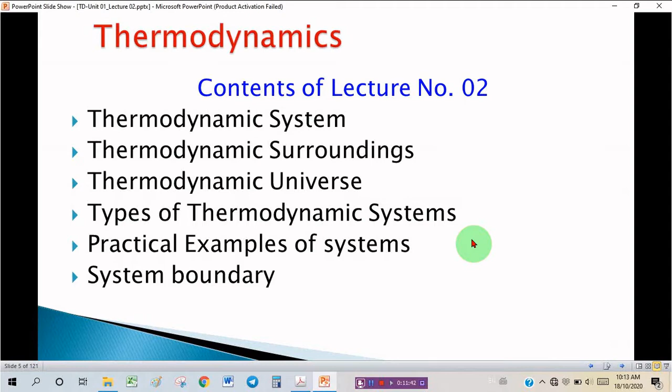So let's move on to these concepts. First one is a thermodynamic system. It is defined as a part of a space or a region or quantity of matter on which our study will be focused, or the thing in which we are interested to carry out some analysis, some design, anything, by applying various principles and laws of thermodynamics.

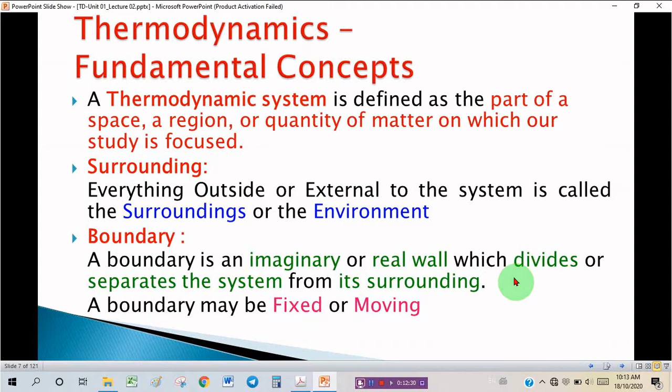Then surrounding: everything which is outside and external to the system is called surroundings or environment. Next is boundary: a boundary is an imaginary or real wall which divides or separates the system from its surroundings. This boundary may be fixed or may be moving. Then next is the thermodynamic universe: a system and surrounding together comprise a thermodynamic universe.

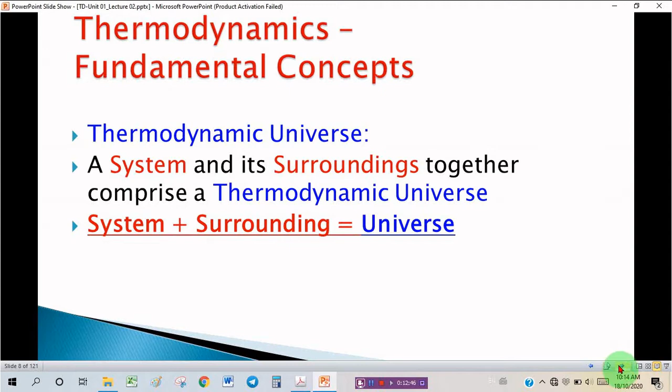Another picture: this is system, this is a clear system boundary, and everything outside it is a surrounding. So system plus surrounding will make entire universe. This is the conceptual diagram.

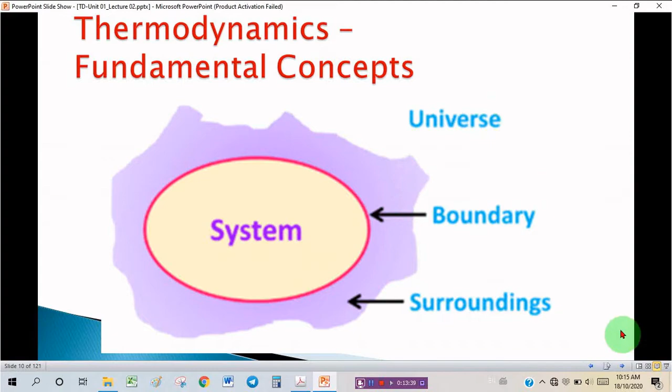Next is how the interaction between system and surrounding can take place. What happens between system and surrounding is known as an interaction. Two types of interactions are possible: one is the mass interaction and the second one is energy interaction.

The system will be having a certain mass. This mass may be increasing or decreasing, depending upon how much mass is coming into the system and how much mass is going out of the system. So mass transfer is possible into and out of the system, known as mass interaction.

In the same way, system will be carrying some energy content. It will increase or decrease depending upon inflow and outflow of energy - how much energy is coming from the surrounding to system and how much is exiting from system to surrounding. These are the interactions by which various processes can be assessed and evaluated.

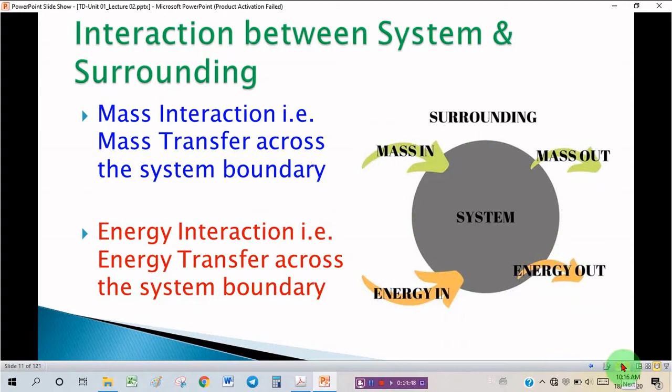To understand how these concepts of system, surrounding and universe work in practice, let us look at this simple example of a pressure cooker. As we know, it is a device used in kitchen for cooking foods like rice or vegetables by steaming process.

Some vegetables or rice is put into this container and some water is added to it. It is put on a gas with a closed lid on it. By absorbing the heat, water converts to steam at certain pressure, and cooking takes place by steaming.

This steam generated inside at certain pressure will not be allowed to escape to outside, because of tight sealing of this top cover. This small thing at the top is actually a dead weight pressure release valve, provided to maintain and ensure the safety of working of the pressure cooker.

Because if no opening is provided, what will happen? Due to overheating, the steam will produce, and pressure inside will build up. It will increase beyond the safety level or safety margin. So in that case, it will lead to explosion or some accident.

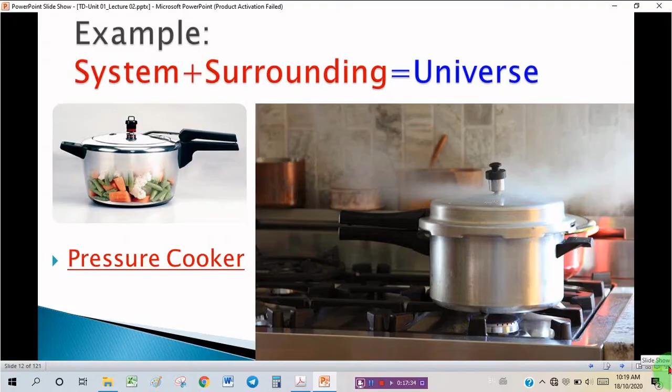Now suppose we are interested to know how much heat energy is required to cook a certain amount of rice. Let us say to cook 1 kg of rice, how much amount of heat energy is required and how much time it takes to cook it. So for that, first we have to clearly define what is a system.

Sorry for the little mess up with the presentation. I wanted to take a pen. Just let me allow me to take the pen. Just a moment, sorry again for a little shake up.

So I was talking about, first we have to identify what is a system, what is a system boundary, and what is the surrounding. Look at this photo now: a pressure cooker is put on a gas for cooking.

So we will first clearly identify or define what is a system. This cooker will be a system, containing this rice and water inside it. This cooker body is a system. The external surface of this cooker body is forming a system boundary, including the handles and this knob. So this is how you have to set up the system boundary.

So this is the system boundary, and everything outside it, as seen in this figure, the other objects like gas stove, burner, everything, these are all part of the surrounding. So having identified what is the system, what is the surrounding, and where is the system boundary, this is the system boundary.

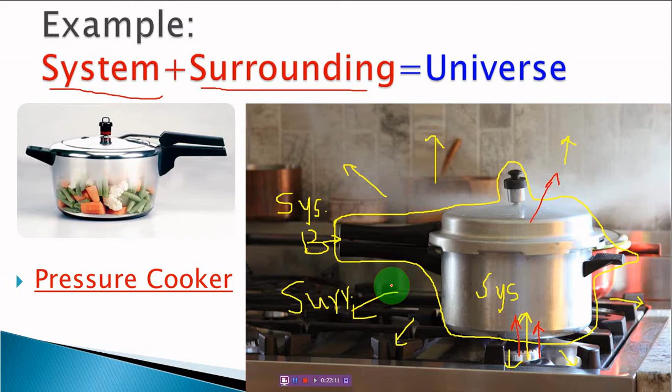For much bigger and complex systems, such as a thermal power station, nuclear power station, or a rocket engine, even though these are simple terms to learn, you should have a clear understanding of it, because when it comes to bigger systems like a rocket engine, there are many components which form the subsystems of that bigger system. So that makes it very critical to decide what is a system, where is the system boundary, what is forming the surrounding, and how they are interacting with each other. To perform a complete system analysis, this thing is very, very important. So let's move on next.

Then there are 4 types of thermodynamic systems. First one is a closed system, or also known as control mass. Second, adiabatic system or insulated system. Third, open system, or also known as a control volume. And the last one is a special case, the isolated system.

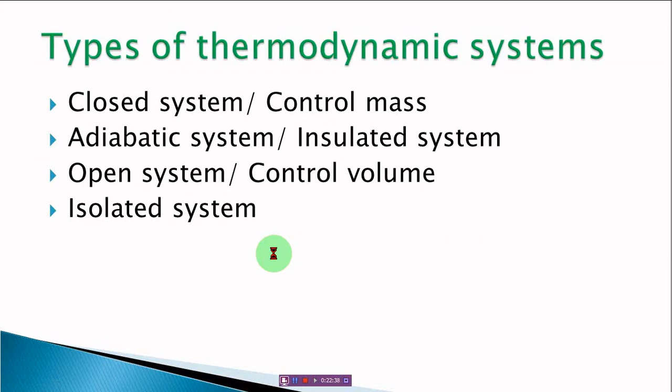Then first one is a closed system or control mass. Look at this figure. A closed system is a system of fixed mass. It means that mass cannot cross the system boundary, but energy in the form of heat or work can cross the system boundary. So this is a system having no inlets or no outlets. Mass transfer is not allowed, not possible. So whatever mass is there within the system will remain constant throughout the process.

And the system will interact with the surroundings only in the form of energy. So energy in the form of heat may come into the system or may exit out of the system. In short, mass transfer is not possible, but energy transfer is possible. This is the simple idea of a closed system.

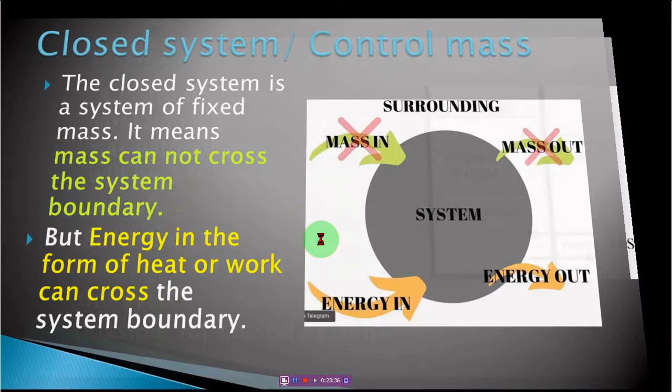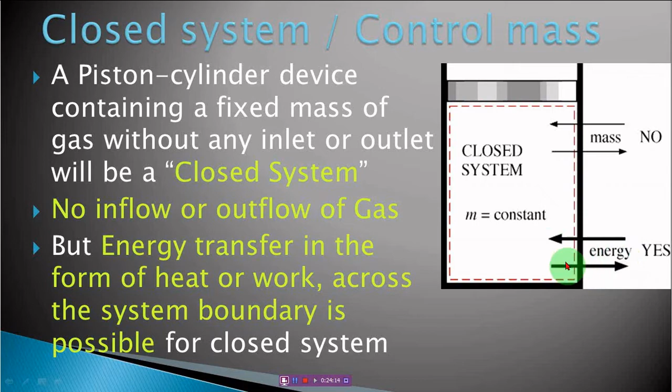Just for example, consider this figure: a piston and cylinder arrangement. This piston is a moving part which can move in up and down direction, a device containing a fixed mass. Suppose this is containing some gas of mass m with no inlet or outlet. There is no inlet or outlet to transfer this mass, so mass transfer is not possible, but energy transfer across this system boundary is possible. So across this container it is possible. This is a simple example.

Let us look at some practical examples. Take this LPG gas cylinder, which is a common utility at our homes and kitchens. LPG gas is present in it at some pressure, and there is a regulator at the top which regulates the flow of gas to the burner through the gas tube whenever the knob of the stove is opened. As long as the gas burner is not in operation or the knob is closed, this regulator will be in closed position, and it will maintain the gas inside at high pressure, not allowing leakage. So the mass of the gas inside the LPG cylinder will remain constant.

In the same way, the tire and tube of a wheel of any car or vehicle is filled with some gas like air or nitrogen at some pressure, thereby it remains inflated. There is a non-return valve or charging valve, and as long as this valve is closed, it maintains its shape and remains inflated. So this is an example of a closed system. But when you release the air through this valve, there will be a mass transfer from inside to outside. So in this way you can find many examples of such closed systems surrounding you.

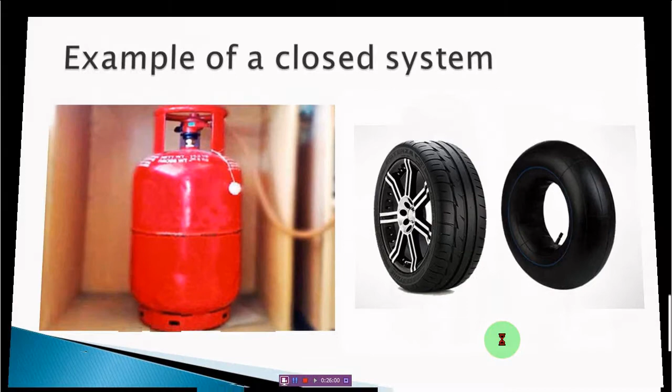Then next is an adiabatic or insulated system. A system which is thermally insulated, that is heat transfer is not possible across the system boundary, is called an adiabatic system. Example is a thermos flask.

A thermos flask is a device which is used to store hot or cold drinks inside it and maintain its hotness or coldness over a longer duration of time. The construction is like this: there is an inner flask and an outer flask, and a vacuum insulation is provided in between. So in this gap there is a complete vacuum, and insulating materials are provided. Insulating materials are those which retard the heat transfer or prevent heat transfer across them.

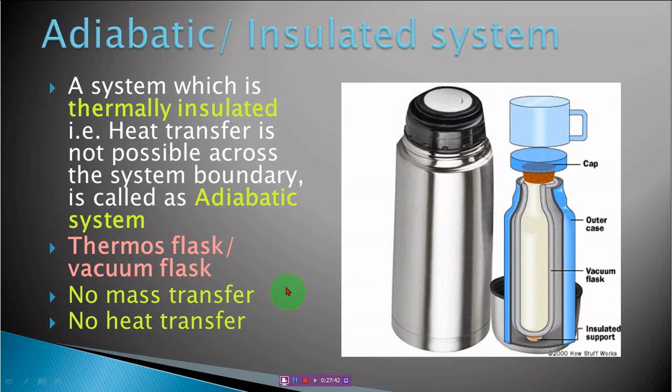Suppose hot water or hot tea is placed in it, so heat transfer from the hot thing to the surrounding cooler environment will not happen quickly, and it will stay hot for some 3 to 4 hours. In this way the adiabatic system works. Since this cover is completely closed, its opening is closed, it will be like a closed system. So simply whenever insulation is provided for a system, it will work as an adiabatic system. No mass transfer possible, no heat transfer possible. These are the two conditions for an insulated or adiabatic system.

Just another example: a tank containing some gas like helium at a certain pressure. It is a closed tank having insulation surrounding it, so no heat transfer is possible. This is a special case where mass transfer will not be possible due to the closed system. No mass transfer possible, no heat transfer possible due to insulation provided surrounding it. But mechanical work transfer is possible.

Suppose we have a stirrer-like arrangement, where the shaft is crossing the wall of the cylinder or wall of the tank, and it is entering into the system. This is the way of mechanical work transfer from surrounding to system. This is possible in case of an adiabatic system.

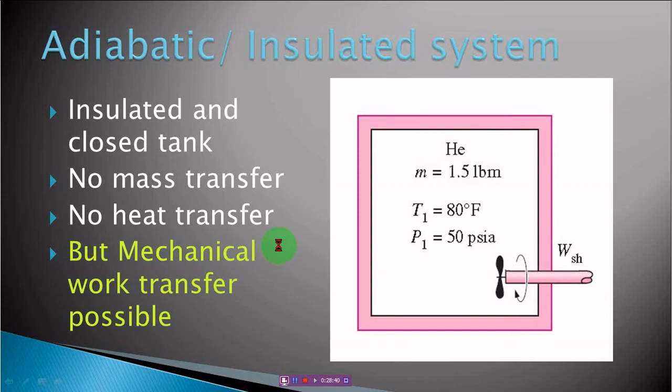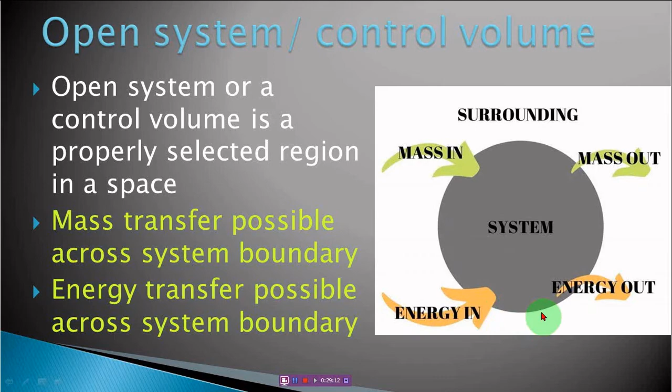Then next is a more general case, that is open system or control volume. In this, both mass transfer and energy transfer are possible. Open system or control volume is a properly selected region in space. Some space or some part of a system is selected or taken as an open system having some inlet and some outlet. Mass transfer across the system boundary is possible. Energy transfer is also possible in various ways, maybe heat transfer, maybe work transfer. Example...

Let us see. Many engineering problems involve mass flow in and mass flow out of the system, and therefore these are modeled as control volumes. Examples are fluid flow through a nozzle, a pipe, flow through a pump, compressor, water heater, turbine, etc. So many such devices, known as steady flow devices, have mass flow in and mass flow out. At the same time, they have energy flow in and energy flow out. With this figure you can easily understand mass can come in, mass can go out through inlet and outlet, and energy can cross the system boundary via heat or via mechanical work or some other mechanism.

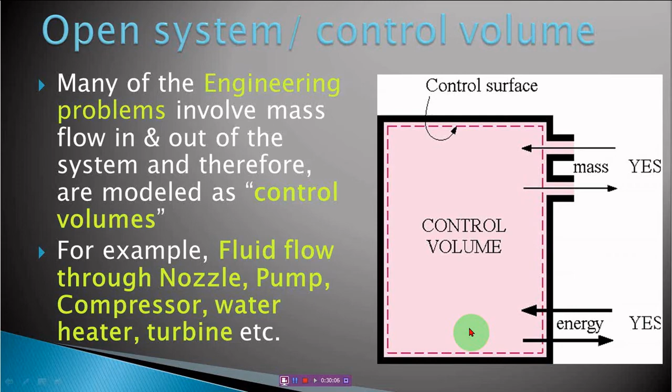Another example, look at this. A domestic water pump is a common utility at our homes, residences, or commercial complexes, to transfer or lift up water from the underground tank to an overhead tank, covering some height of the building. Here we can set up the system boundary like this, so this pump body will be a system, and this is how I can draw the system boundary around this pump.

This suction pipe which is entering into the pump will be the inlet, and the discharge pipe which is exiting out of this system will be the outlet.

Water is sucked in, so there is water inflow into the pump body, and the same amount of water is leaving out through the outlet or delivery pipe. So water is coming in, water is going out, and mass transfer is possible across the system boundaries.

To drive the impeller of the pump, usually we use an electric motor, which supplies mechanical shaft work by conversion of electricity into rotary mechanical shaft work, and that rotating shaft is coupled to the impeller, which is rotating here. So mechanical work or energy is transferred to this impeller, and the impeller transfers that mechanical energy to the water by centrifugal action, thereby increasing its pressure.

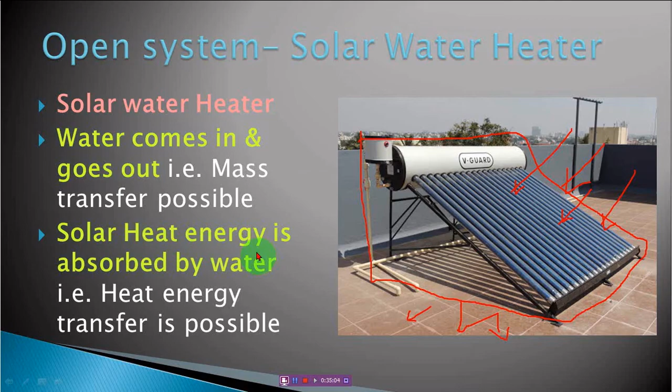This way you can identify as many examples as possible out of your day-to-day life experience. You just have to be aware and attentive, and have some clear idea, so that you can manage how to identify a system, how to set up a system boundary, and how to identify a surrounding.

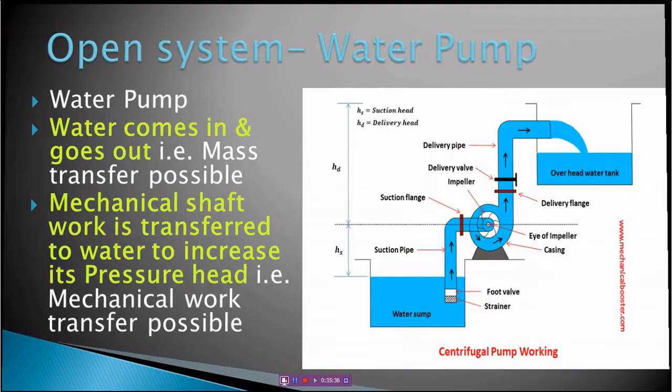Then a special case of an isolated system. In this system, neither mass interaction nor energy interaction is possible in any way. No mass coming into the system and no mass leaving out of the system; no energy coming into the system and no energy going out of the system. So it is completely isolated.

Now this isolation term has become quite famous in this COVID pandemic situation era, and since our lockdown we have been familiarized with words like isolation, quarantine, etc. To realize this system, consider a patient with a COVID-19 positive result suffering from that infection. For the first 14 days he is put into an isolation ward or isolation room, so that isolation room becomes an isolated system for him; the man will be isolated within the system from the outside world or external things.

Only food and medicines are delivered to him, so it is not a completely isolation, it is a partial isolation. For 14 days he is totally isolated from the outside world, the same was happening with lockdown also.

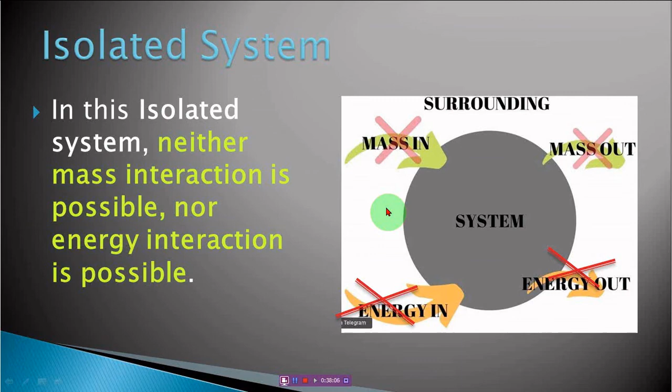That was the case in lockdown, so that can also be taken as an isolated system. Of course it cannot directly relate with physical systems, I'm just taking that as an example because such systems are very rare to find in practice. That's why I had to explain it in terms of a common experience.

Then again, you can take a Thermos Flask as an isolated system, because we saw that in case of an adiabatic or insulated system, it is provided with complete insulation or vacuum insulation, thereby heat transfer is not possible across the wall, and mass, being completely closed at the top, will remain inside. It will not transfer from inside to outside, or anything entering from outside to inside.

Again, there is no provision to transfer energy in some other form, like mechanical work - that is also not possible. So all these three things not being possible make up the isolated system: no mass transfer, no heat transfer, no energy transfer. That's it.